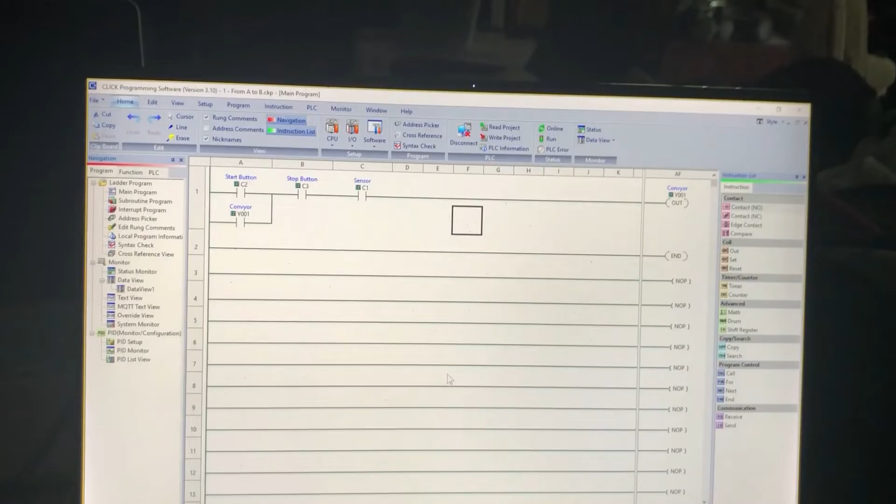Alright, so then I'll go ahead and show the hardware of how everything is set up. That's the Factory I/O software, I'm just using my laptop. Then this is the free Click PLC programming software that I use.

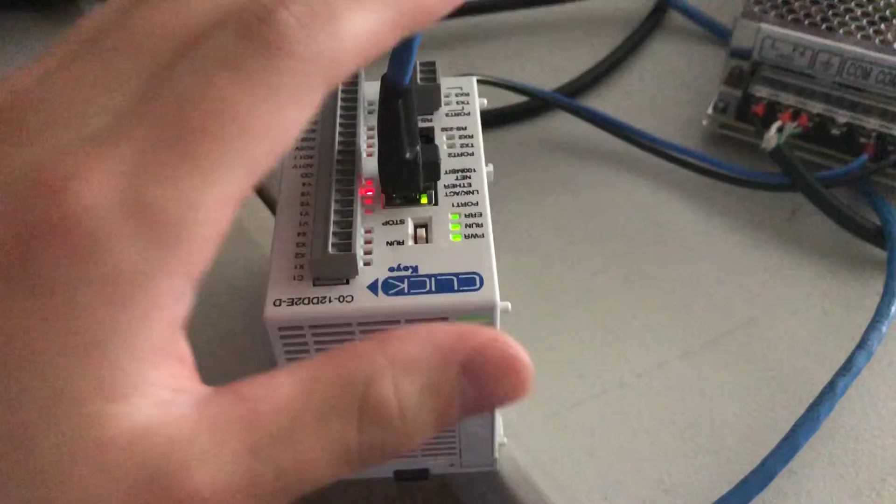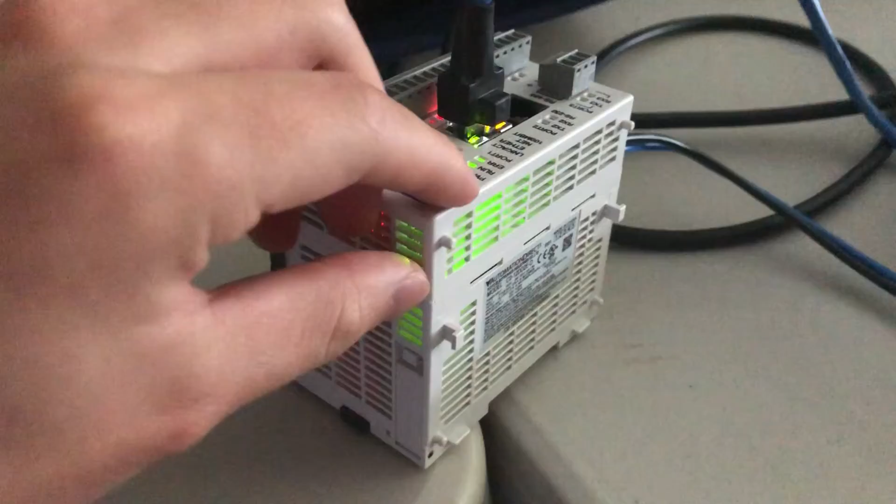And then I have it connected through an Ethernet cable going into this Click PLC, which was only about, I think, $160, which is by far the cheapest PLC that I could find. You can buy a power source that snaps onto the side, but I decided to use this because it was on Amazon, about 20 bucks, which was cheaper than the power source.

So yeah, I'm just using this old PlayStation 3 power cable, because no one plays PS3s anymore. It's from a wall socket up there, and then it turns into a DC power supply, which goes into the PLC there.

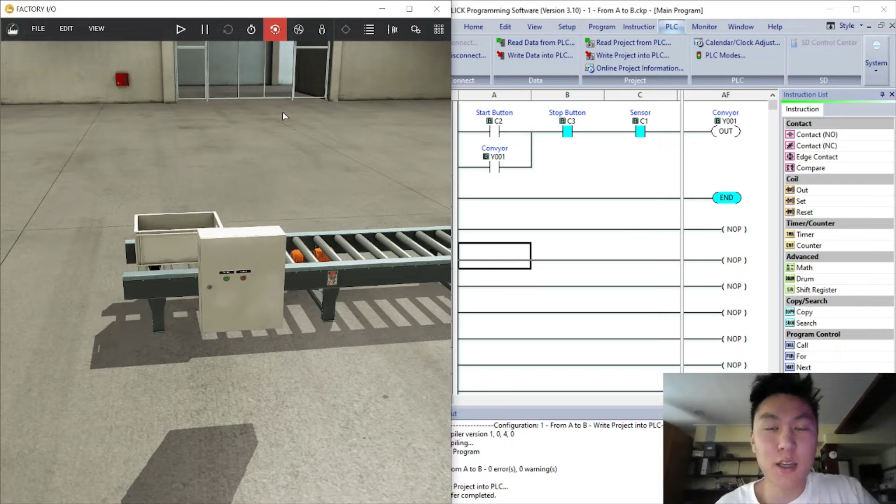I'll go back to screen sharing to show how everything is configured on my laptop. So I will explain how to get the Click PLC to communicate with Factory I/O. The settings I have set up, I go to File, then Drivers, then Configuration.

You need to select Modbus client - doesn't have one for Click PLCs, so you go through this, and then these are all the settings that I have configured.

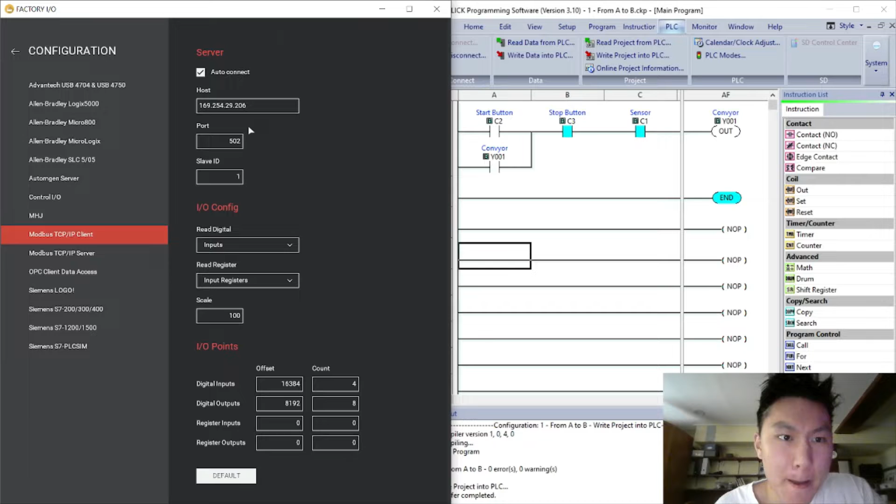Here will be your inputs and then your outputs. So I have a sensor in this first spot, which corresponds to what I have here, C1 in the programming software. Then start button C2 and stop button C3, and then the conveyor, which is the output in this first. I don't know why it switches inputs and coils, I think it's just a Factory I/O thing, but it still works.

So let's see, I'm gonna go ahead and run this. The cool thing about the programming software is you can see what's active through these blue or cyan lights. So I can hold down the start and you can see it activates it. That's going to go and it'll keep going.

I'll just explain this program since I have it out and it's fairly simple. So if I press the start button, this all connects and activates this conveyor belt, which activates this because it's the same thing. So it'll continue moving even once I release the start button.

And then the stop button, when I press it, it's NC, normally closed. So when I press this button, it'll open it, which breaks the connection and stops the conveyor belt.

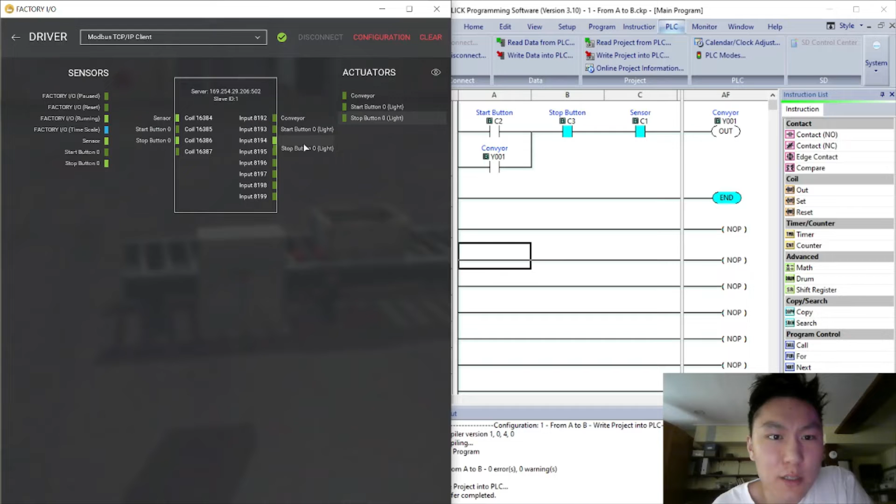And I guess I could try adding these lights real quick, so let's see if I can do that. Start and stop button lights. Alright, bear with me, I'm still learning, so.

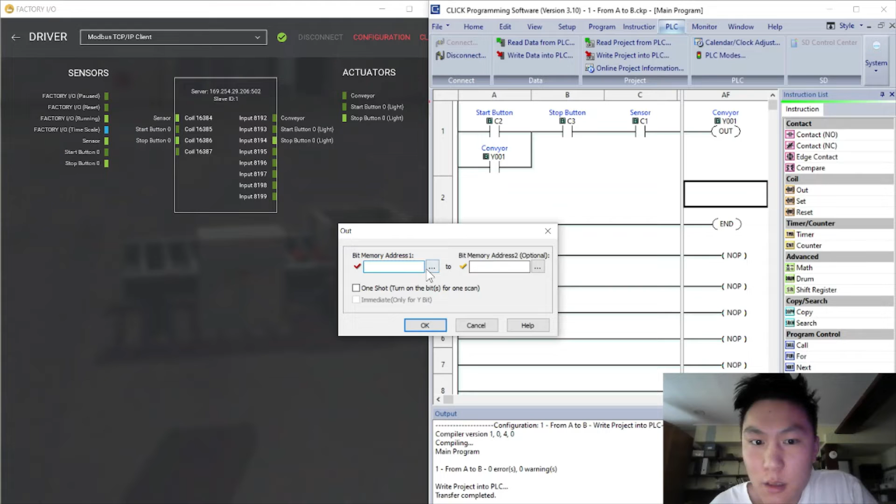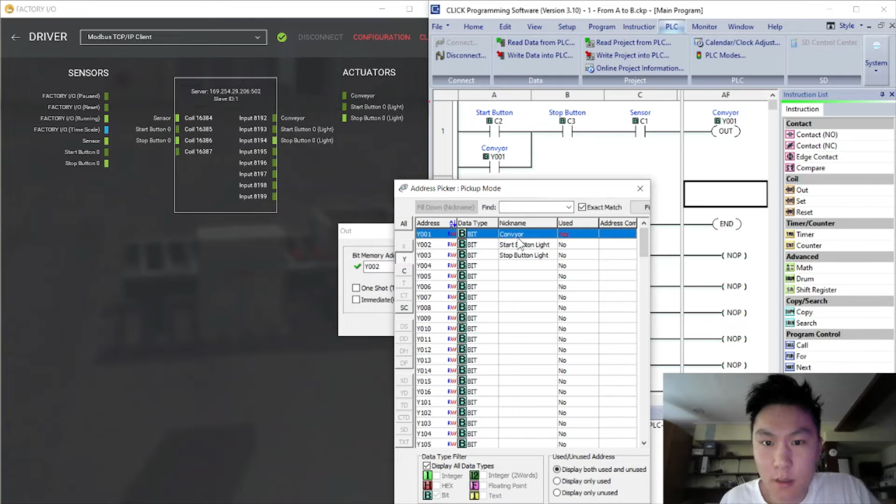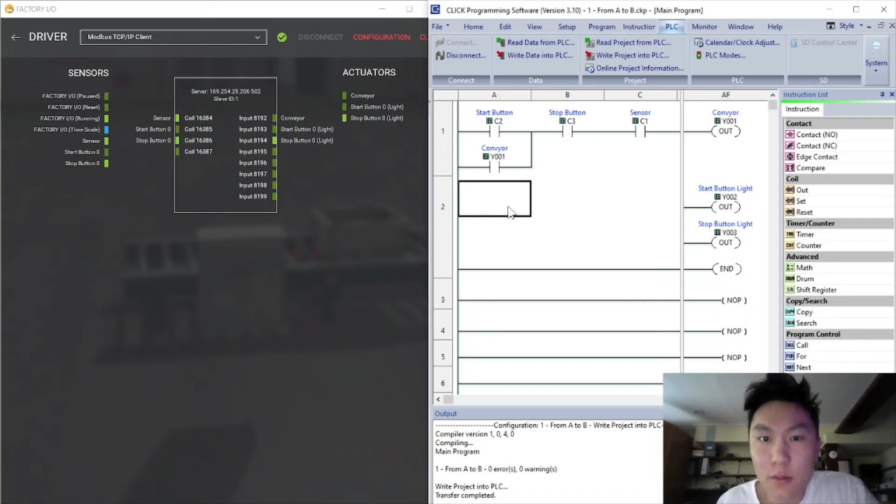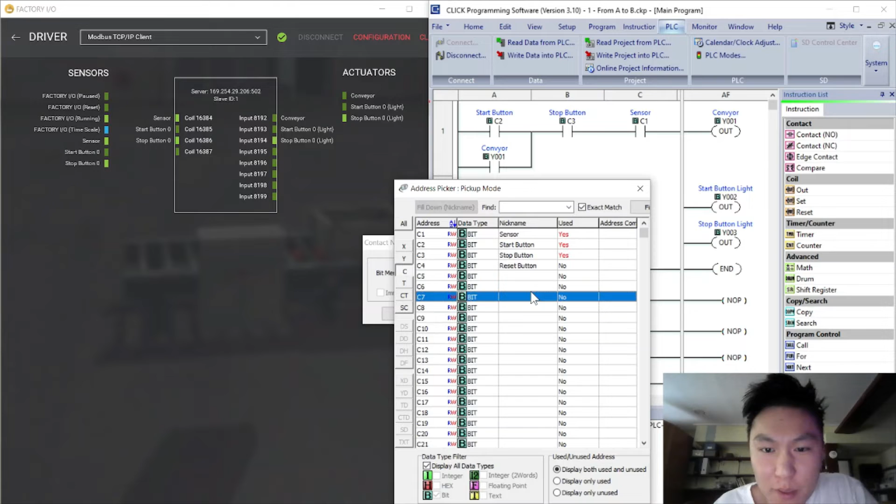Alright, and then we'll add the buttons. So when you press it, you want it to turn on. So, go to C's. I'm probably not gonna get this right on the first try, if I'm gonna be completely honest, but you know, it's a learning process. Just gotta keep on going.

How do you connect this now? I actually don't know. I think I'm gonna come back once I get it.

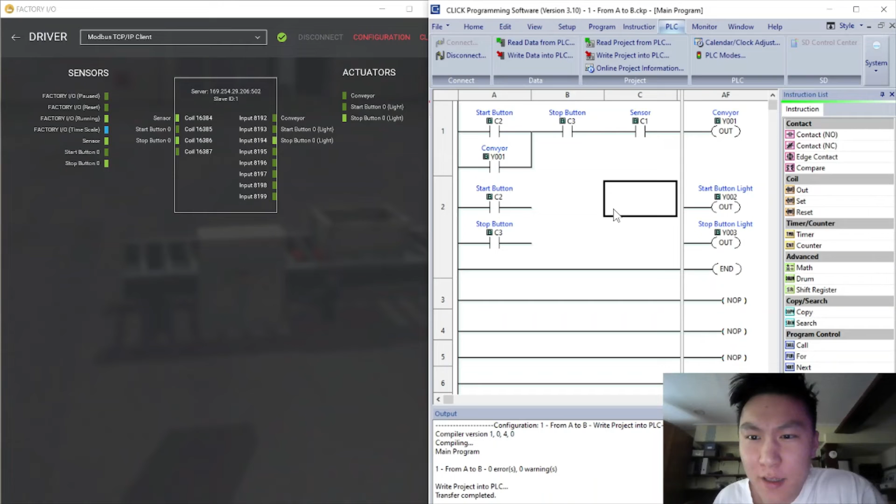Alright, I finally figured it out, and it took me longer than I'd like to admit. I'm not even sure if this is the most efficient way or the best way to do it, but it makes sense in my mind and it works. So yeah, I'll just show it real quick.

Right now it's stopped, so the stop light's on. Start.

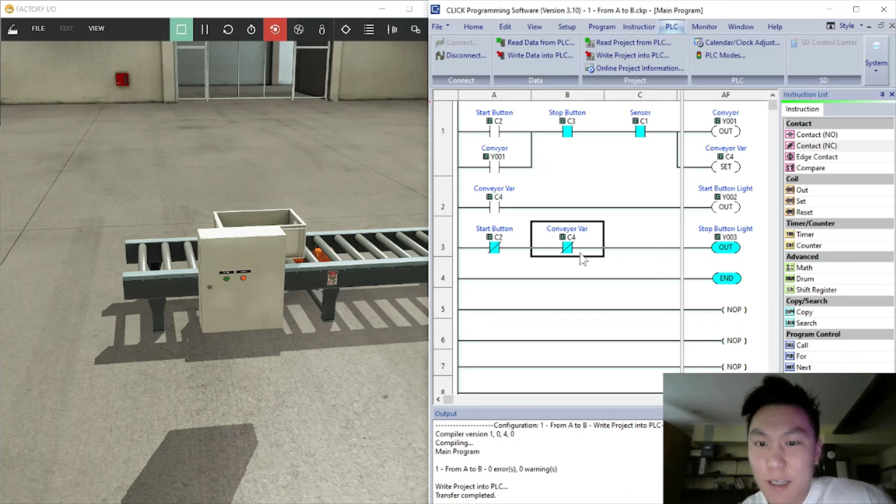So the way I did it was I made this variable, this C4 variable. So when the conveyor's on, this variable is on. So when it's on, then the start button is on, right? And then this is a normally closed contact, so when it's on, this opens and the stop button light should turn off when the conveyor is on. And then pressing the start button opens this switch, which breaks the circuit, the connection, and the stop button light turns off.

So yeah, that's the way I did it. Just let me know if there's a better way, I feel like there might be.